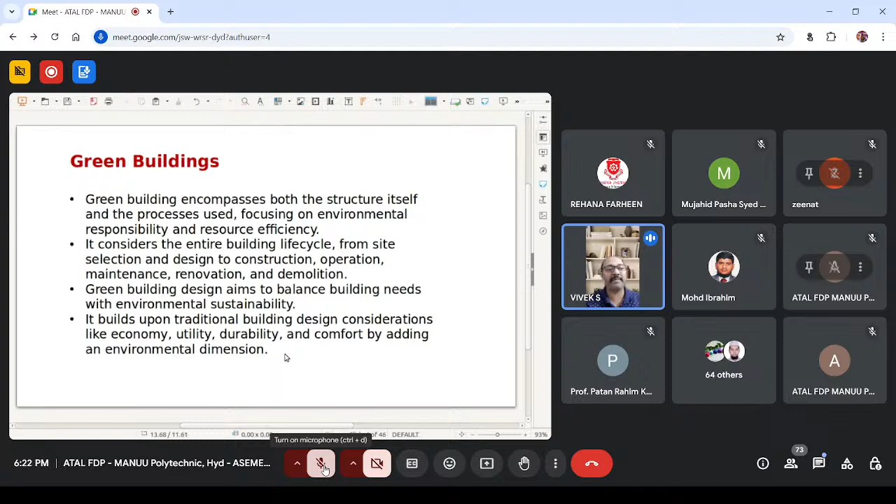And what are actually the goals of the green building? The goals of the green building are, you can say, 5 Rs. What are these 5 Rs? Starting with reduce the usage of materials, reduce the usage of resources, reduce the usage of the site, reduce the usage of water, reduce the usage of energy, reduce the usage of every possible thing that is involved in the design or construction, and in the transportation of the materials also.

Each and every point and each and every criteria is there for certification of the green building, and also for the purpose of environmental sustainability. And then reduce and response. What kind of response will be there? Response is important - in case of any issue, in case of any shortcomings, in case of any bottleneck, what response is, or what action is taken in order to resolve that issue?

So renewal of resources, because recycling and renewal are very important things. And refusal to accept anything which is against environmental sustainability - these are the primary goals. These 5 Rs are the primary goals of green building, which are, you can say, a design philosophy for going ahead with the green building.

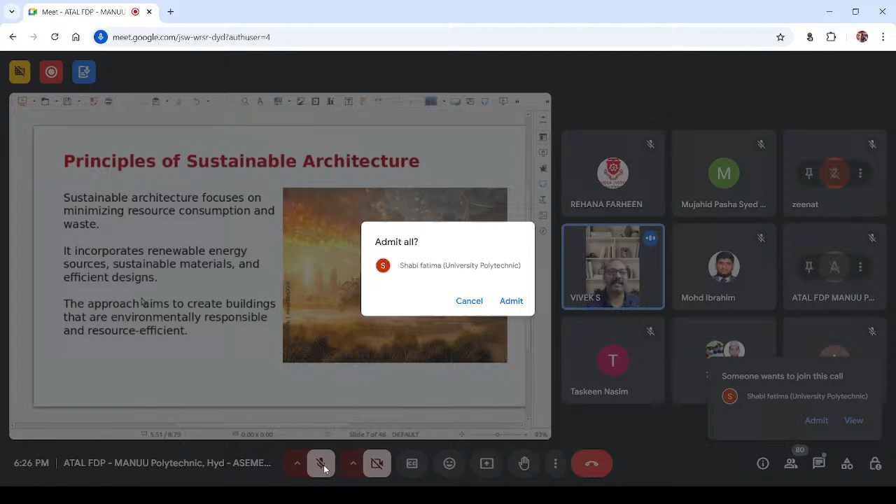So what are the principles of sustainable architecture? There are some fundamental principles of sustainability that apply to whatever architecture you are going at. The focus of sustainable architecture is basically minimizing resource consumption.

As much as possible, the resources - from the site, materials, transportation, fuel, energy, water, and even waste sewage - whatever resource, whatever element that is involved, everything should be minimized. The consumption should be minimized, even the waste also should be minimized, and you also have to ensure that the waste is recycled. And of course, the best examples are in our neighborhood.

So many examples are there, even nearby Serene County, which is near MANUU. Or you can take the latest establishments like My Home or Aparna. They are doing it, and also the CII building in our Gachibowli area, the Godrej Business Center.

That is CII, Confederation of Indian Industry building, which also has a green building, or My Home Bhuja, or Aparna Cyber Zone, or Commune buildings, and more such constructions, and so many gated communities. Government is also ensuring this. We'll see down the line what certifications and criteria are there to ensure environmentally sustainable development. The approach for following these fundamental principles is to create buildings that are environment responsible as well as resource efficient. These are the two criteria that are followed.

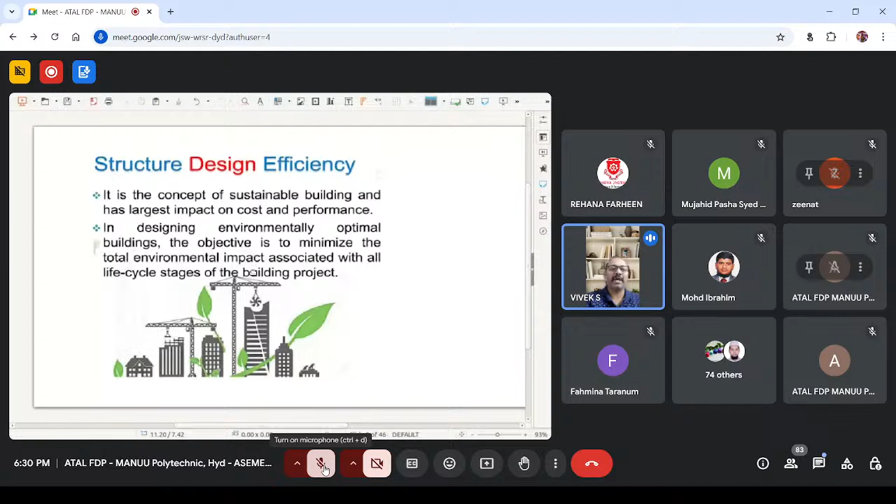That is the idea - during structure design, the best practices are to be followed to have better environmental impact. For example, what practices can we make for a structure to improve structural efficiency? One thing we can do is use the local ecosystem as much as possible. One important factor involved in structural efficiency is site selection and design.

While selecting the site, when going for big green buildings, for sustainable architecture, we have to select the site such that it is properly ventilated, and environmental disruption is as minimal as possible. For example, if you have a lot of vegetation in the site selected for construction, and you have to deforest all the plantation or landscape there, that will have a negative impact on the environment.

So while selecting the site itself, you have to see what the minimum expenditure is, and not only expenditure but minimal environmental impact. For example, when there's a hillock in the site, or some uneven plane, whatever unevenness or vegetation is there should be considered while designing, so that minimal impact will result.

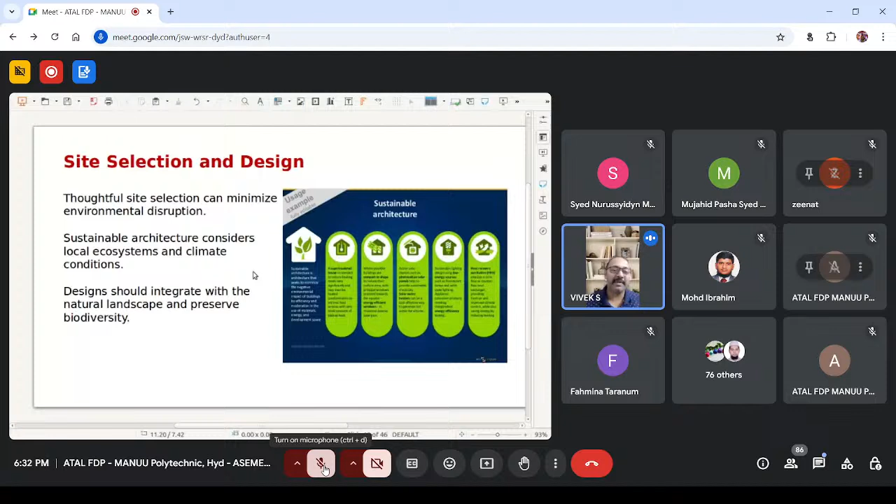Apart from structural efficiency, another fundamental principle of energy conservation is energy efficiency. Energy efficiency is a cornerstone, very much pivotal, and it will play a pivotal role in green building design.

The government of India has recognized this key role, and not only India, most governments across the globe are focusing on it to reduce our reliance on fossil fuels and usage of non-renewable resources, and increase usage of renewable or non-conventional energy resources like solar plants, wind turbines, desalination plants, and hydel plants, among other things, to improve energy efficiency throughout the life cycle.

The purpose of this is to lower power consumption. Not only will it impact operational expenditure, but it will also have a huge impact on the efficiency of the green building project, as well as on environmental impact.

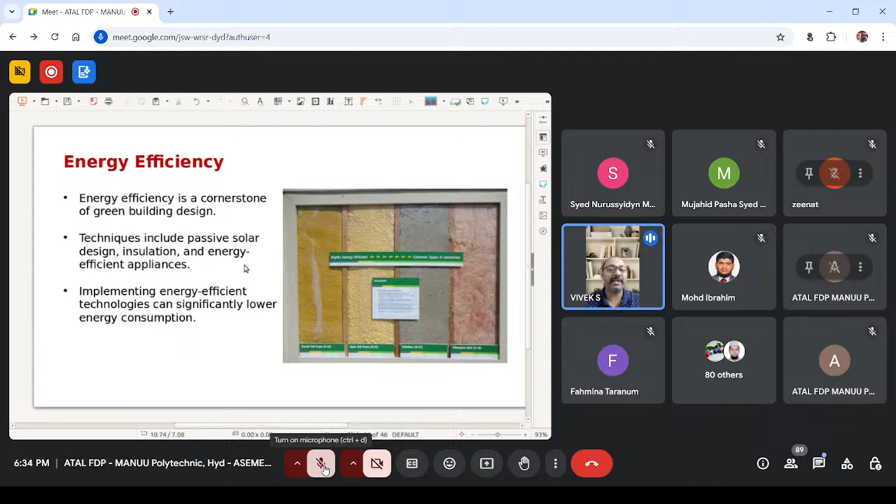One fundamental thing I mentioned is renewable energy, or energy from non-conventional sources like solar plants, wind turbines, geothermal systems, and now even governments are looking at green hydrogen plants. These are areas where integrating renewable energy sources with sustainable architecture will have a lot of impact.

So we have to see that in green buildings, renewable energy sources are integrated for sustainable buildings. This practice aims to reduce our dependence on fossil fuels like petrol, diesel, and gasoline, which will reduce carbon footprints, as you have already seen in structural design. Our aim is to reduce carbon footprints, which lowers greenhouse gas emissions too.

So it will help in reduction of pollution and reduction of over-utilization of resources, thereby helping Mother Earth achieve greater sustainability.

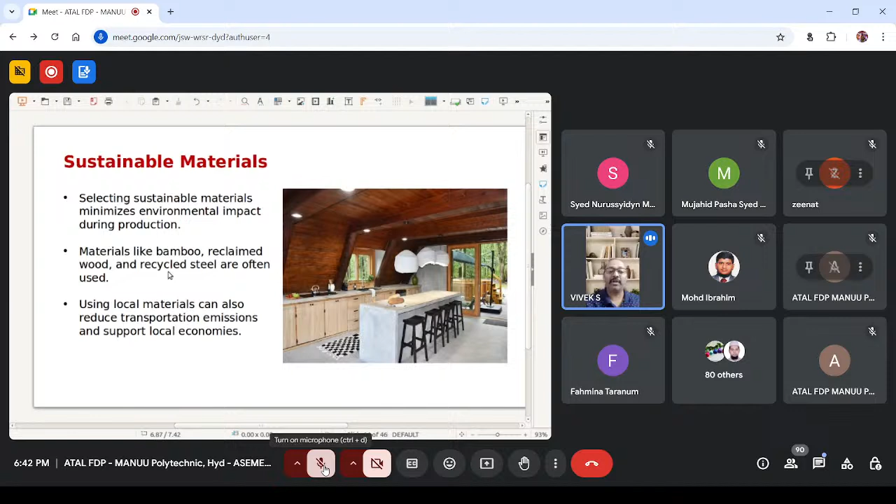So whatever material you're using, if it is already recycled material, already used material, or garbage that is being reused, it has a lot of positive impact on the environment.

Apart from that, another important fundamental principle of sustainable architecture is indoor environmental quality. The materials used for green buildings—interiors, furniture, paints, lighting—should be selected carefully, since many materials used are toxic.

One fundamental principle is we need to monitor the occupants' health and well-being. If you're using paints that emit a lot of chemicals and toxic gases, it will have a negative impact on health and sustainability for the occupant. This is factored in as IEQ, which stands for Indoor Environmental Quality, vital for occupant health and well-being.

What is most vital is that while designing or constructing the building, we have to ensure IEQ is considered—natural lighting, good ventilation, and non-toxic materials, whether in cement quality, paints, furniture, or steel. Everything should be taken into consideration during the design and implementation stage. And if you prioritize not only health but also comfort, the productivity of the occupants will increase.

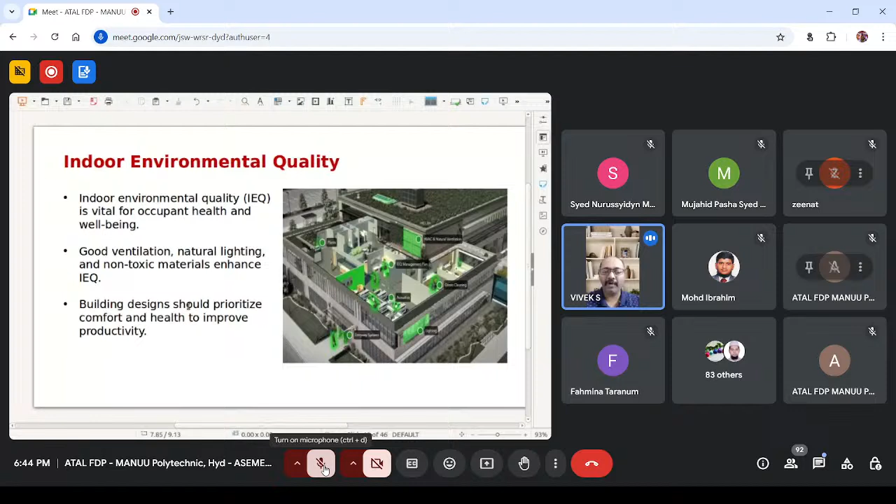And the indoor environmental quality. So the idea is IEQ. IEQ is about the effects of maintaining IEQ in green building and sustainable architecture: the comfort level of the occupants will increase, the well-being will increase, the health will increase.

Obviously, if you are maintaining your occupants of the buildings, maybe the employees or staff or faculty or workers, and if their comfort level is increased and their health is improved and their well-being is looked after, the productivity will be much more improved. The green building should ensure proper landscaping, proper ventilation, and proper greenery, so people can stay healthy and comfortable, and whatever air they breathe will be clean.

Clean air should be given to the inmates. Also, whatever materials they are using should not be harmful to health. The living comfort or working comfort in the building should ensure that the inmates or occupants or residents should not fall sick. That is the fundamental idea.

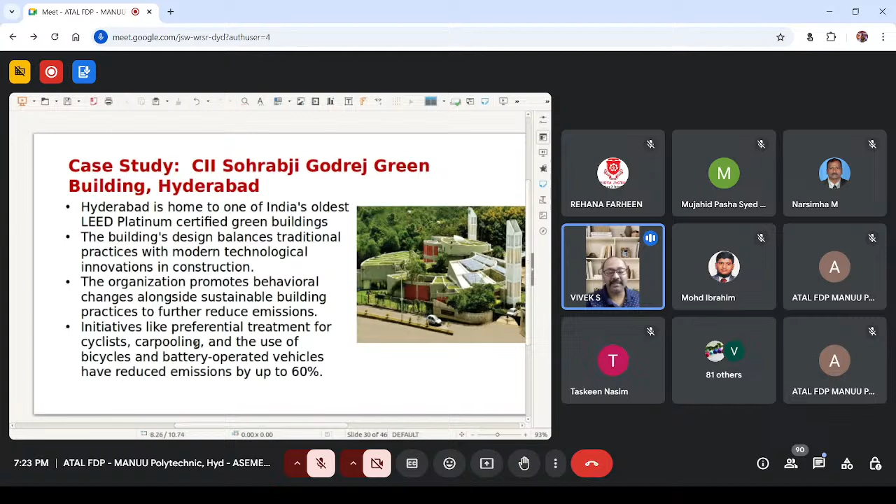They are also using other initiatives for occupants, giving preferential treatment for cyclists and carpoolers, and users of bicycles are encouraged in the campus. Also battery operated vehicles have been there from long back, reducing emissions by up to 60%. So these are various practices they are doing.

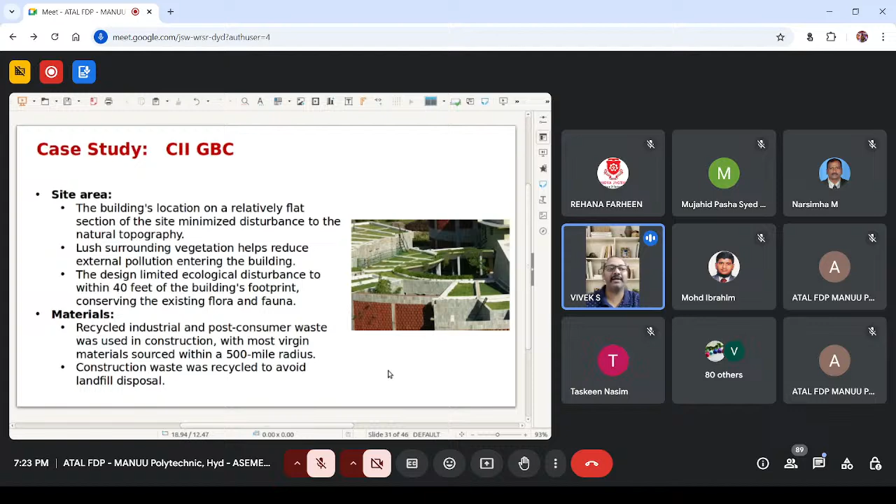For site area, they considered what all LEED criteria apply. They ensured the lowest ecological disturbance, within 40 feet only, and natural topography is maintained. Materials also are mostly local virgin materials within a 500-mile radius, and mostly construction waste only is used for disposal of material for construction.

Also, 77% of the building material contained recycled content like fly ash, bagasse, or recycled paper aluminum. And for waste management plan, they ensured 96% of the construction waste was recycled.

Air quality improved by more than 15 to 20%. Their air conditioning load is reduced by 15 to 20% because they are using aerated concrete blocks made of fly ash for facades, and low VOC materials for paints. So air quality is taken into consideration.

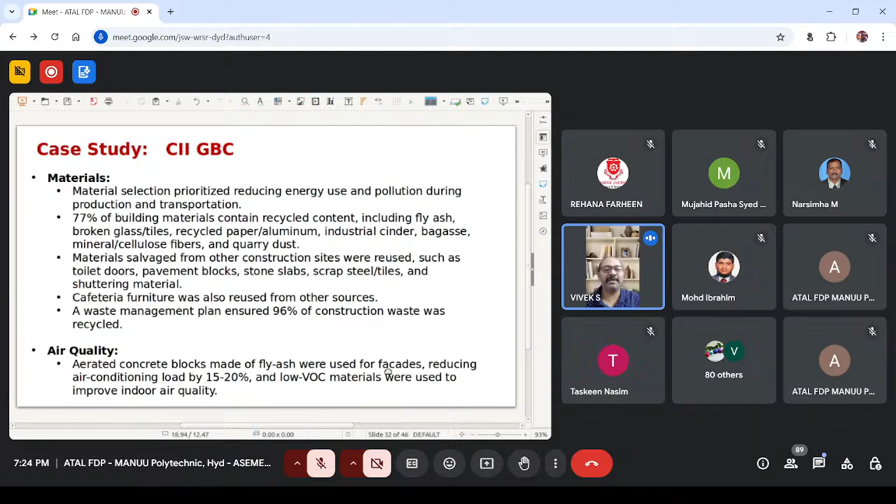For cooling, as I told you, these can be called wind catchers, or wind scoops or Badgirs. There are 2 or 3 such wind towers for natural ventilation, since they are tall structures. In the GBC hall there are around 2 wind towers for energy savings only.

These wind towers supply air cooled by up to 8 degrees centigrade to the air handling units, which significantly reduce the load on the air conditioning system. These wind towers work in combination with the air conditioning system, so cool air is provided to it. This gives a lot of energy efficiency, the natural environment is taken care of, and indoor air quality is improved.

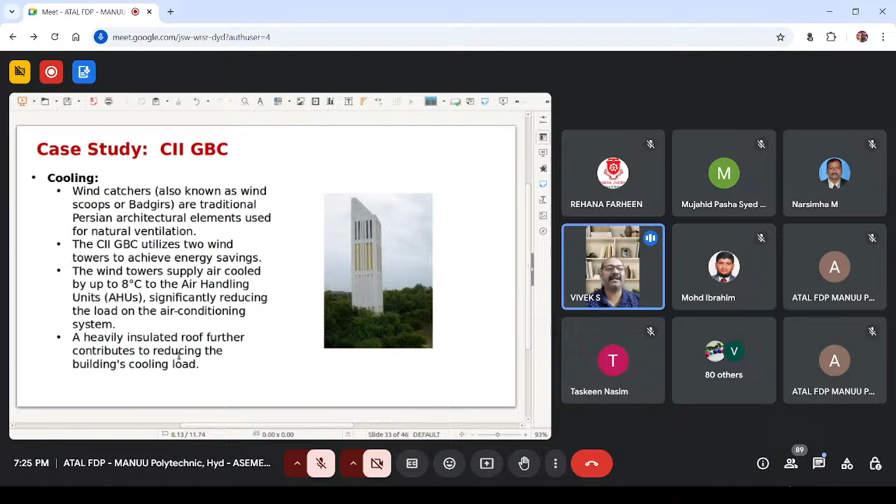And the heavily insulated roof further contributes to reducing the building cooling load. So these are all the different things they are taking into consideration.

Water efficiency is also considered: permeable pavements are adopted, wastewater treatment is there, and low flow fixtures are arranged in their buildings. For energy efficiency, they use a green roof covering 50% of the roof area, and solar panels contribute a 20% reduction in energy demand.

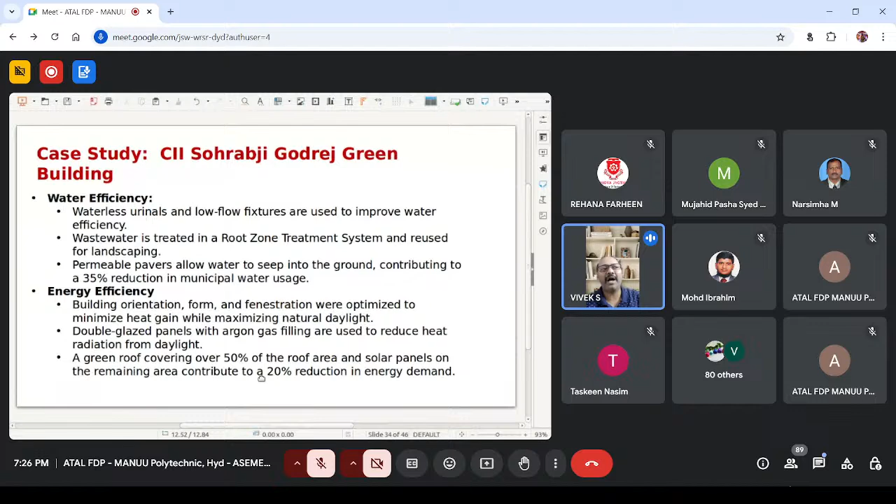So in all aspects, whatever criteria we've discussed in green building certification, they are following energy efficiency. This GBC, the Green Business Center, has carried out more than 1950 energy audits so far, certified from their website, including audits done across many countries.

IGBC certification is there, Green Pro Eco Label certification for using sustainable products, Green Co certification for using a holistic mechanism to improve ecological footprint and use renewable energy, and they also meet Green Energy Council standards. This is the best example in India, and fortunately the CII Sohrabji GBC is very near our campus. There will obviously be challenges in architecture.

Financial challenges will be there, technical challenges will be there. You have to use smart technologies, which means some technical capabilities are required, and also for implementing green buildings, definitely some financial challenges will be there. So of course training and education will help in avoiding these misconceptions, and building capacity.

That is one thing. So what are the future trends in this? If you take the stats from right now, 2024, in this industry - in 2017 the figure was around 7.4 billion, and now it is projected around 38.2 billion by 2027. By using latest technologies like IoT, cloud computing, and AI, green technology is improving, the market size is improving, and the trend in coming years will still be improving.

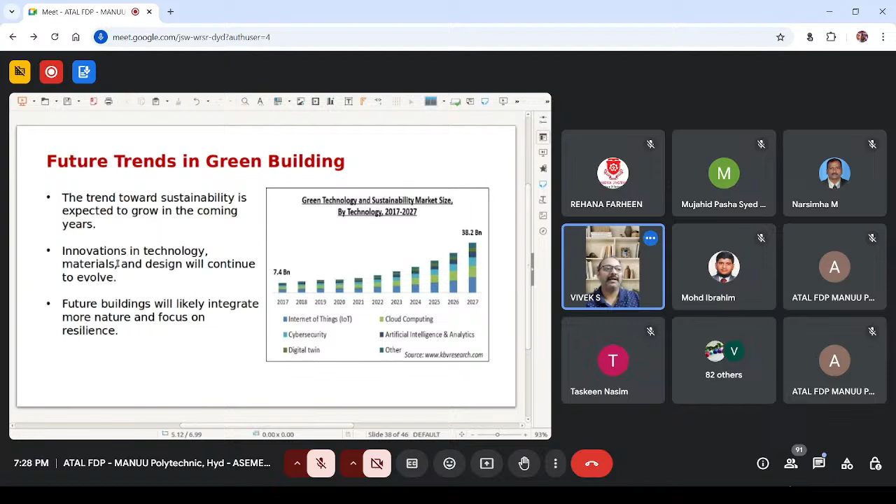There will definitely be a role of government and policies. If government provides good incentives or grants and regulatory practices - regulations like RERA, or different regulations in different countries - it will definitely improve energy efficiency and sustainable design. So there should be collaboration between the government and the private sector, which is essential for the progress of sustainable architecture.

Education and awareness is very important for the public, and seminars and webinars should be there. Architects, builders, civil engineers, and the public should be thoroughly aware about sustainable practices and the benefits of green buildings.

And from a global perspective, the population is rising to 9.8 billion by 2050, so it will put a lot of pressure on resources. If we want sustainability, if we want to provide a good environment to our next generation, to our children, we have to ensure that the worsening of our current environment is as minimal as possible, and we need to follow different approaches for sustainable architecture.

We need to take the help of technologies, smart technologies, and the business and local communities. Since it's a complex and multifaceted issue, there is no easy solution. We have to collaborate and work together - public establishments, private establishments, and different organizations coming together to have a sustainable future for everyone.

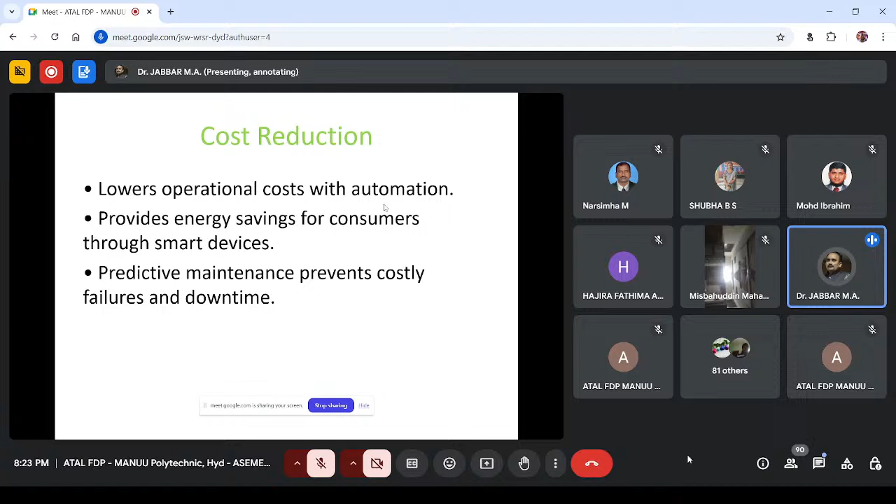Sometimes we may hear that the grid is down. I think 6 months or a year back, we saw in the news that the NTPC power grid failed and went down. If the grid is down entirely, there is too much obstruction in the power supply. So we need to predict how the power supply has to be distributed to different areas. How will it happen? We have to use technology. Then only it will be possible to identify the power supply demand.

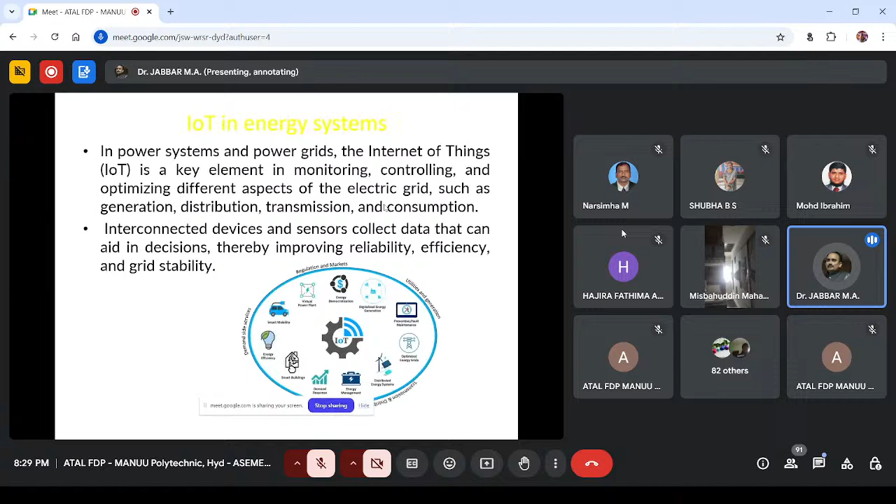The worldwide Internet of Things in energy market was estimated to reach about $35.2 billion by 2025, with an annual growth rate of 11.8% from 2020 to 2025. This means there is a huge demand for IoT components, especially in the energy sector. People are ready to invest $35.2 billion by 2025.

The global energy consumption has risen rapidly because industries are growing. Everybody needs power, and this energy consumption is going to rise until 2045. Now, how are we going to manage this?

Hydropower and renewable energy consumption will increase between 2045 and 2050. Now, when there is no coal, where do people have to go? Obviously they have to go for hydropower and renewable energy, using solar as well as wind.

The demand for wind and solar power will increase between 2045 and 2050, reaching 30% worldwide. Another point: IoT technology will lead to an overall reduction in the consumption of electricity, that is 1.6 petawatts in 2030, as well as a decrease in use by 300 billion cubic meters.

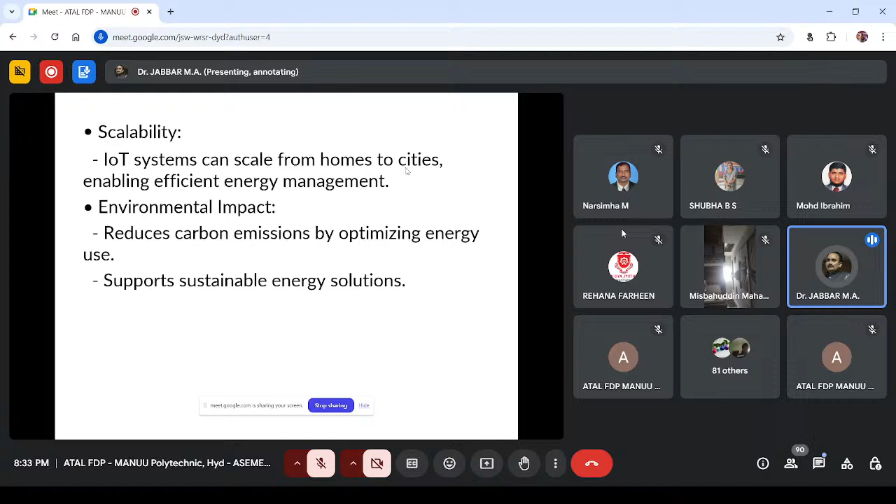Another aspect is scalability: IoT systems can scale from homes to cities, enabling efficient energy management. Another is environmental impact, which is used to reduce carbon emissions by optimizing energy usage.

Now, another portion of our energy management is artificial intelligence.

As of now, we discussed how IoT is useful for energy management, what are the components of IoT, what is the architecture of IoT, what are the applications of IoT, and how IoT is used for energy management. Another portion of the topic is how artificial intelligence is going to be used with energy management.

The name itself indicates artificial intelligence is nothing but a simulation of human intelligence in machines which are programmed to think, reason, learn, and make decisions like a human being. In simpler words, AI means we are going to simulate machines which behave like a human being. The key features of AI are that it mimics human beings, adapts to new inputs, and executes tasks typically done by humans. That is called artificial intelligence, making a system think and act like a human being.

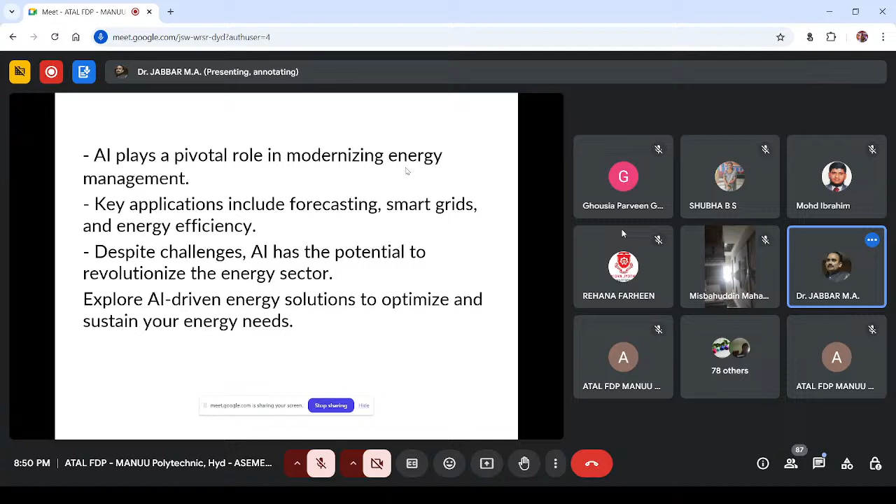Even we cannot bear a 5 minute power cut. Similarly, we can say AI is the new electricity. Without artificial intelligence, no organization or industry is going to run. So we are calling it AI is the new electricity, and we need to identify AI driven energy solutions to optimize energy needs.

Applications in renewable energy: how AI and IoT are used in solar and wind energy optimization. It is used to forecast renewable energy generation, because unlike power generated from coal and water, renewable energy generation is very difficult to forecast. So we need to manage energy storage and distribution.

These are the benefits of AI and IoT in energy management: improved energy efficiency, cost reduction, enhanced sustainability, reduced carbon footprint, and also proactive maintenance and reduced downtime of the power supply.

Improved energy efficiency: AI will optimize energy consumption by analyzing data. IoT sensors will be used to monitor real-time energy use, like the example of smart thermostats and automated lighting systems.

Cost reduction: AI predicts and reduces unnecessary energy usage, thereby we can reduce the cost. IoT ensures operational efficiency through monitoring, and it will be used to reduce operational and maintenance cost.

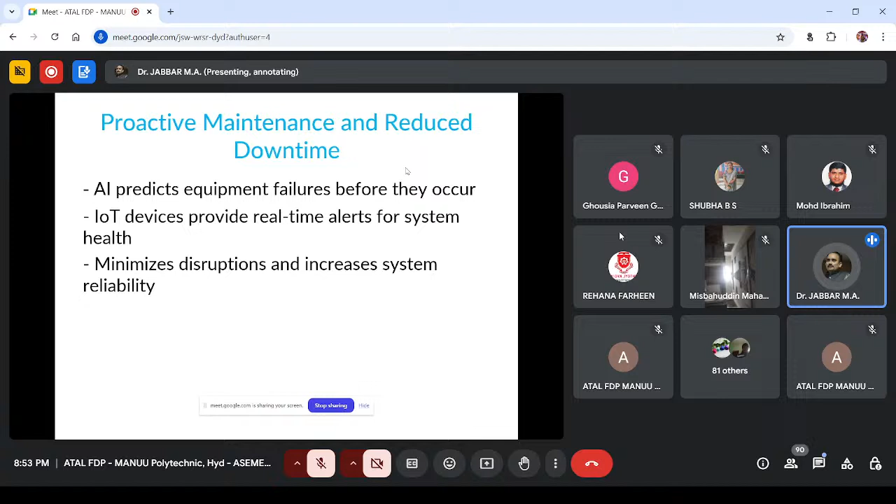If we integrate AI and IoT, we can enable proactive maintenance and reduce downtime. AI predicts equipment failure before it happens - this is called fault tolerant systems. We can identify whether a machine is working properly or when it is going to go down, so AI will predict equipment failures. IoT will be used for a real-time alert system for system health, thereby minimizing disruption and increasing system reliability.

What are the challenges and limitations? When you integrate IoT components and sensors with artificial intelligence, you need to manage the data generated from the grids. Challenges include data privacy and security concerns, high initial implementation cost, and technical challenges in integration, because power generated from solar and wind is different from other sources. You will face technical challenges in integration, and also challenges when converting aging infrastructure into a smart one, as well as challenges when installing smart meters.

There are various technical challenges, and another is we need a skilled workforce. If people don't know what IoT or artificial intelligence is, they cannot work on smart energy systems or smart grids. That is also another challenge and limitation.

What are the future trends in AI and IoT? Integration with smart grids and blockchain. We also mentioned we need to build autonomous energy platforms. Whenever you use AI, you need to predict the demand for power supply, and we need to make sure 5G or 6G is integrated with IoT.

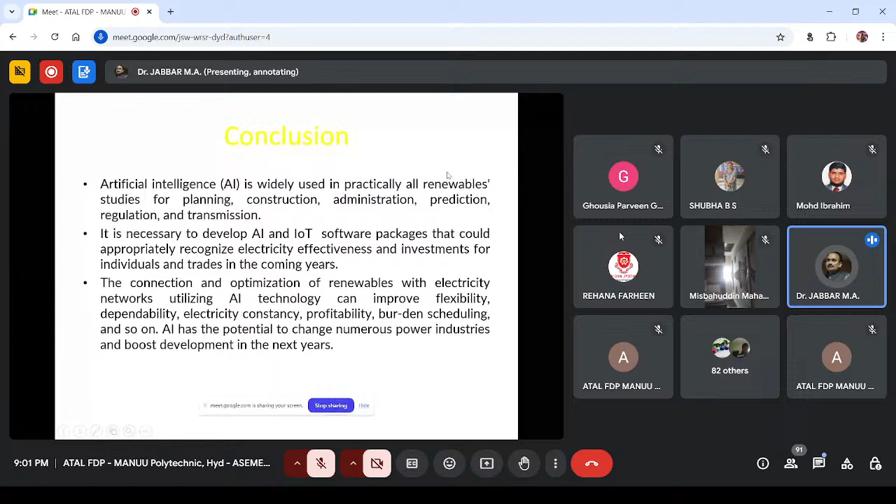Integrating AI and IoT with energy management will help achieve efficient energy management, which supports sustainable development and the sustainable development goals. For this, we need to work to build efficient AI and IoT systems that enable efficient use of energy management. With this, I'll stop my presentation. If anybody has doubts or questions, you can ask me.